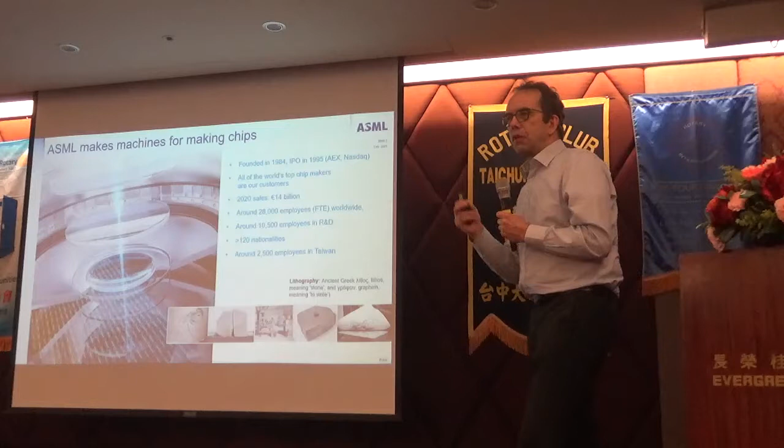ASML is a company that makes machines to make chips. We were founded in 1984. 11 years later, we had an IPO, and we're listed today on the Amsterdam Exchange and Nasdaq in New York.

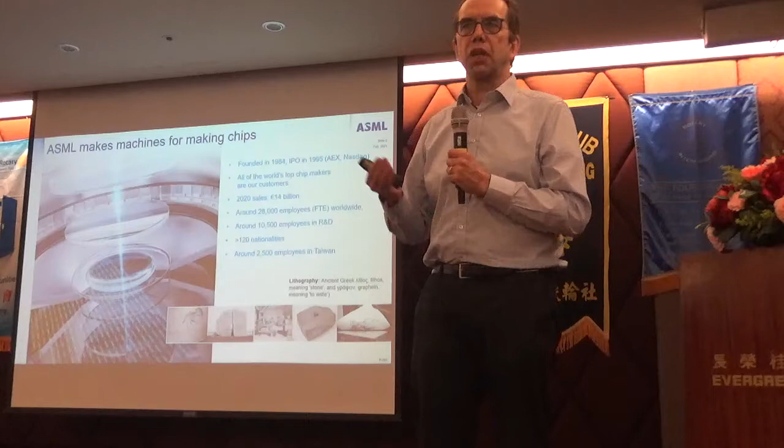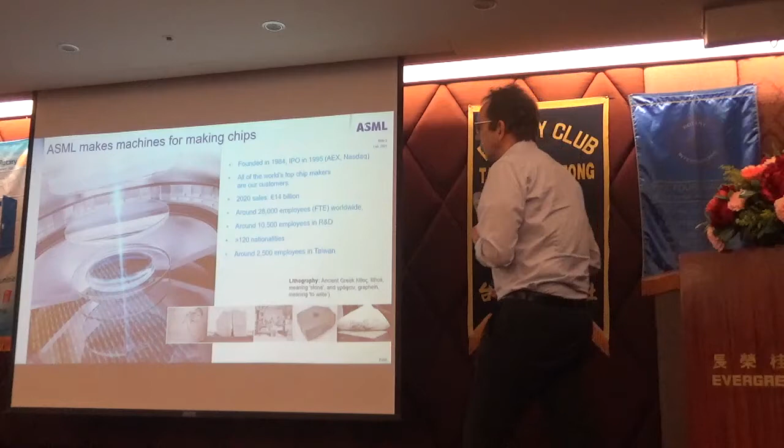Today, all of the world's top chip makers are our customers. So TSMC here in Taiwan, but also Samsung in Korea, Intel in the United States, SMIC in China, they all are our customers. Last year we had 14 billion euros of sales worldwide. For that we needed 28,000 employees worldwide.

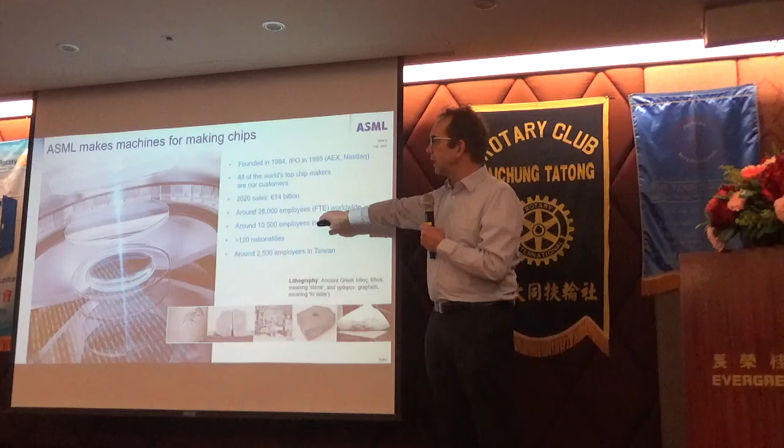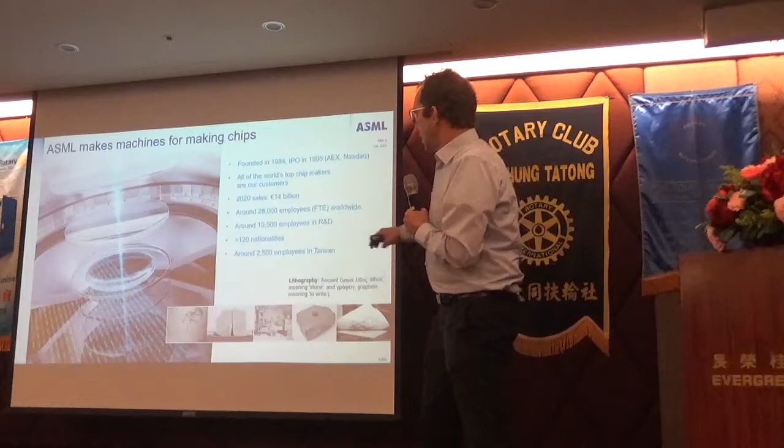Almost half of the people are in research and development, because development of these equipment is crucial to the progress of the company. We have more than 120 nationalities at ASML, so almost every country in the world that has a university education has people working in ASML.

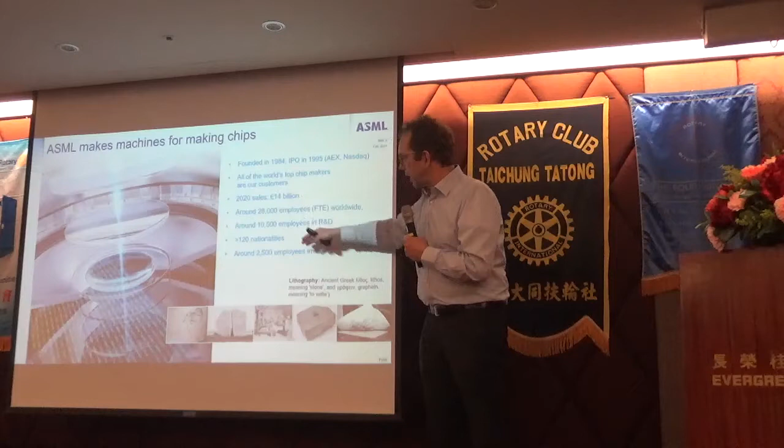And here in Taiwan we're also big, 2,500 people working here in Taiwan in support of TSMC in manufacturing a part of our equipment as well.

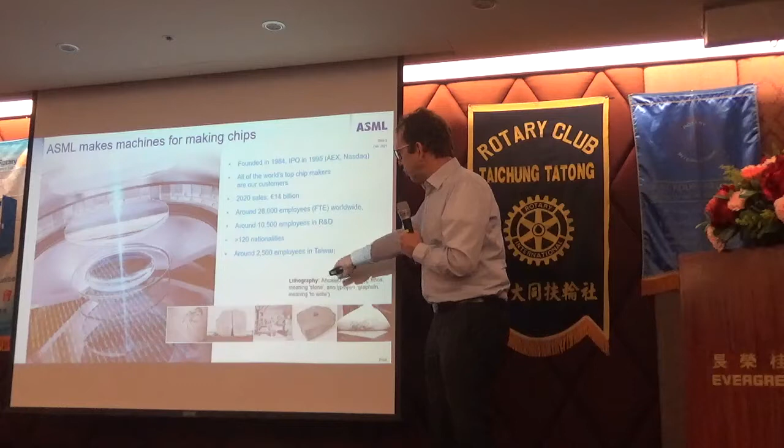Lithography is what we do. And lithography is a Greek word composed of two Greek words, lithos, which is stone, and graphein, which is writing. So it's writing on the stone. And that is what we do. We write the design of the chips onto the wafer, which is a crystalline stone-like material.

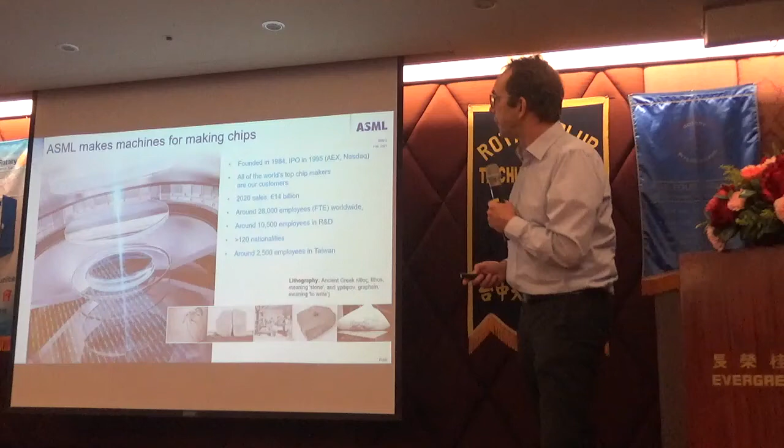The story of ASML begins in 1984 with only 31 people, an attitude that they can make it happen, and it was a lot of work to get it off the ground. There were times when the company was almost bust.

It didn't have a lot of money in the beginning, but already very early on, TSMC was among the launching customers. The relationship was because Philips founded ASM Lithography, and Philips was also a founding partner to TSMC. So the relationship between ASML and TSMC is already a very old one.

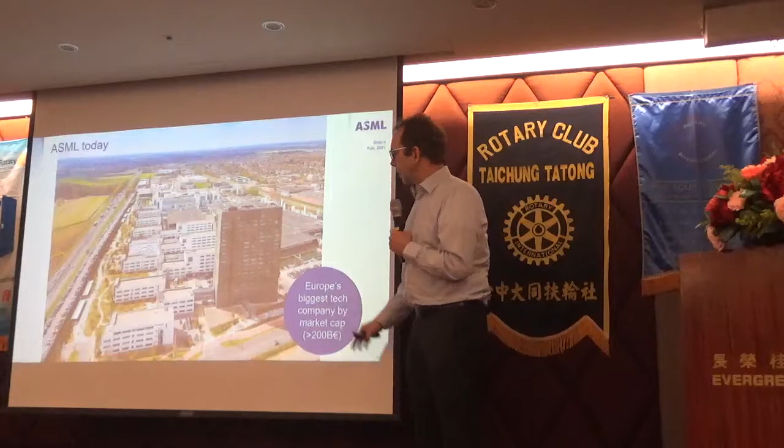If you look at ASML today, it's quite different. All of this is ASML today. We have a 20-story high tower in which our CEO is sitting here on the top floor.

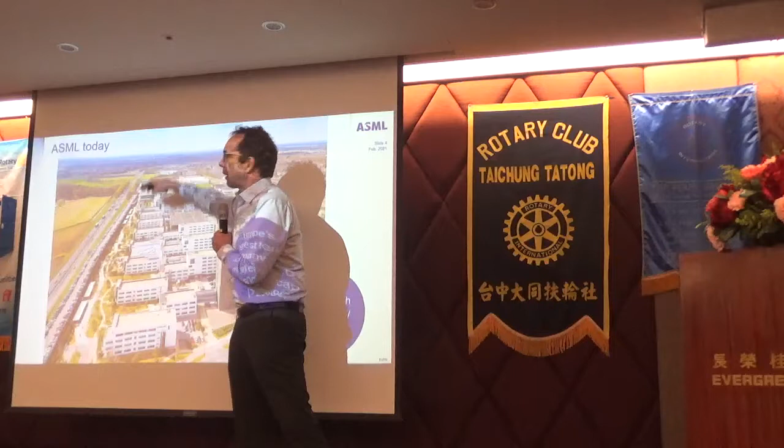We have a large factory for the old systems. We have a new large factory for the EUV systems, and we continue to expand. There's always building going on because we're a growing company.

And today we are the biggest high-tech company in Europe, with a market capitalization of more than 200 billion euros of total value.

So we are present everywhere where customers make chips, which means we have, well, obviously a lot of presence in Europe, that's close to home, but we're also very big in the United States, and we have a lot of presence here in Asia, where our biggest customers today are in Taiwan, in Korea, the US, and that's where most of our revenue goes these days.

ASML is a company that helps propel Moore's Law. And you heard Essen introduce the company, ASML. And these two characters are the characters of Gordon Moore's name. That's no surprise because many companies do, they make a link. But ASML and Moore's Law are tightly linked.

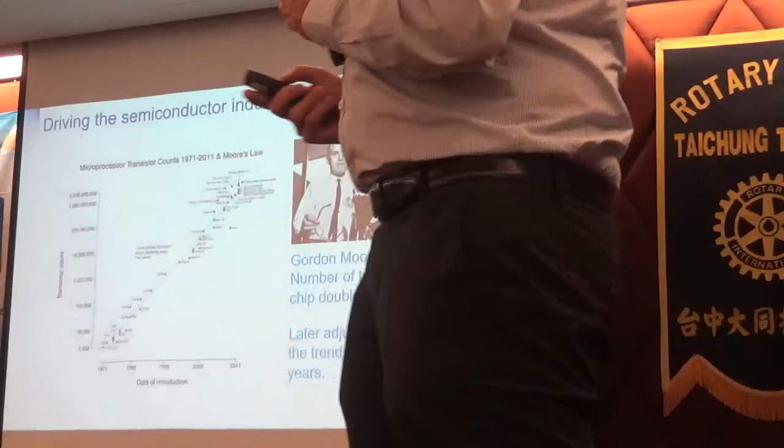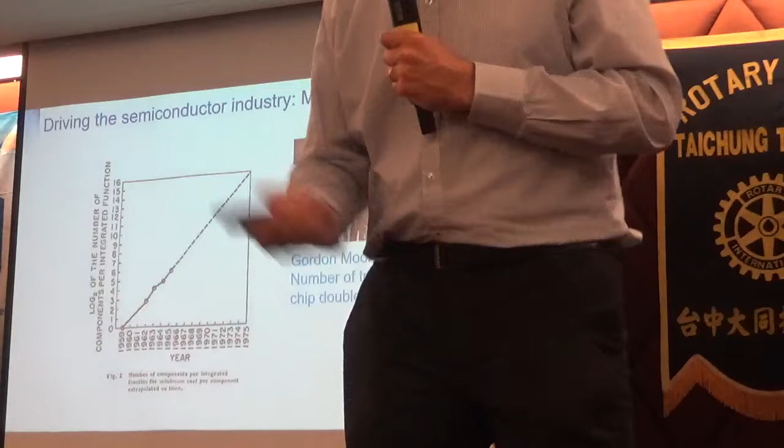Let's have a look at Moore's Law. What was Moore's Law? In 1965, Gordon Moore observed that the number of transistors, number of switches on an integrated circuit was going up very rapidly. And he said, well, the number of transistors on the chip doubles every year. He made that prediction in 1965 based on a couple of data points.

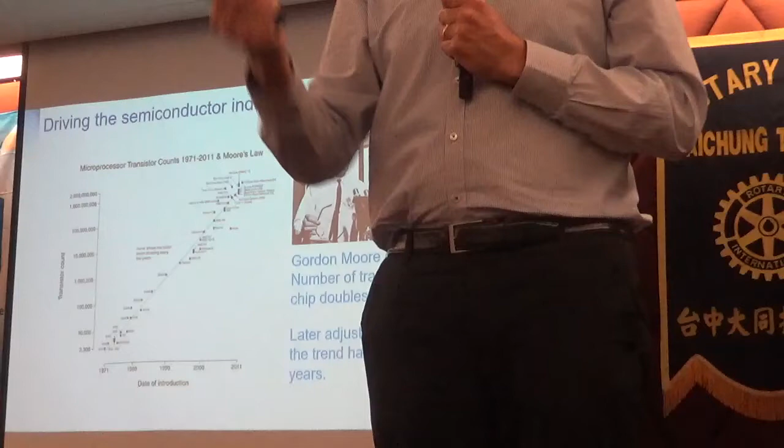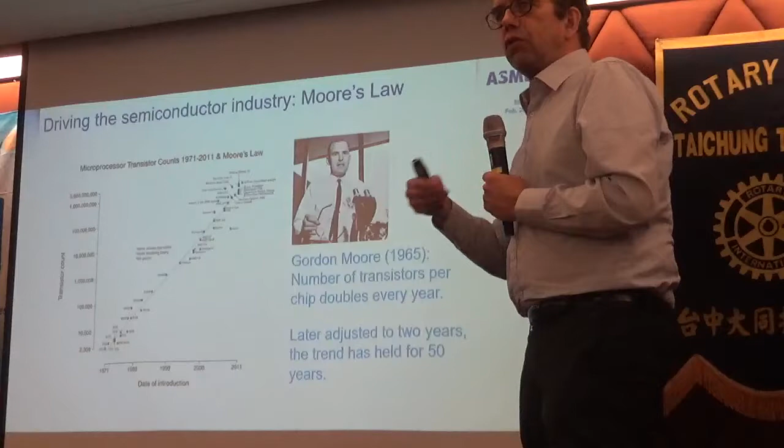We're 50 years later today, and the trend has continued ever since. I don't know if you've ever heard about the famous riddle of a gentleman who asks for a reward, and says, well, to the Chinese emperor: give me 1 grain of rice on the first square of a chessboard, and 2 grains on the second, and 4 on the third, and 8 on the next one. If you go into a process of doubling and doubling, you end up with trillions of transistors on a device. And that's where we are today.

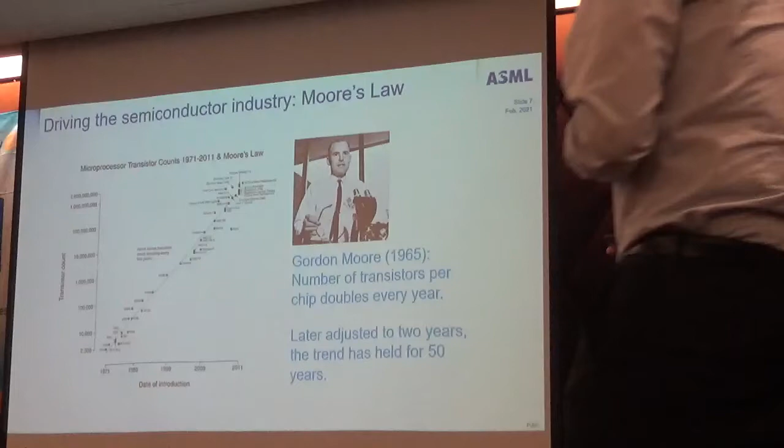These devices are extremely complicated and can do almost anything you can imagine. And the trend continues ever since that time.

We're able to do that because we make them smaller and smaller and smaller. If you look at the design of a chip, from one generation to the next, the design remains more or less the same, but you make it smaller. By making it smaller, more of these chips fit on the same area. We write these chips on round substrates, which are thin plates of silicon, 300 millimeter in diameter.

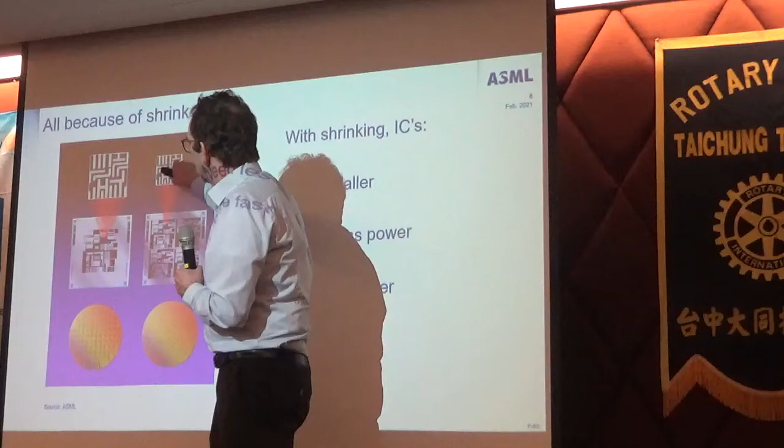And with this shrink, these integrated circuits, these electrical devices, obviously get smaller. But because they are smaller, they need less power, because this needs more power than this. And because they are smaller, the signals have to travel a shorter distance, so they get faster. And because they are smaller, there are more chips that fit on a wafer, so they also become cheaper. So all at the same time, from generation to generation, you get smaller chips that need less power, are faster and cheaper, all at the same time. And you do that for 50 years, doubling every generation. And then you build an industry of billions, and you build a company like TSMC is here today.

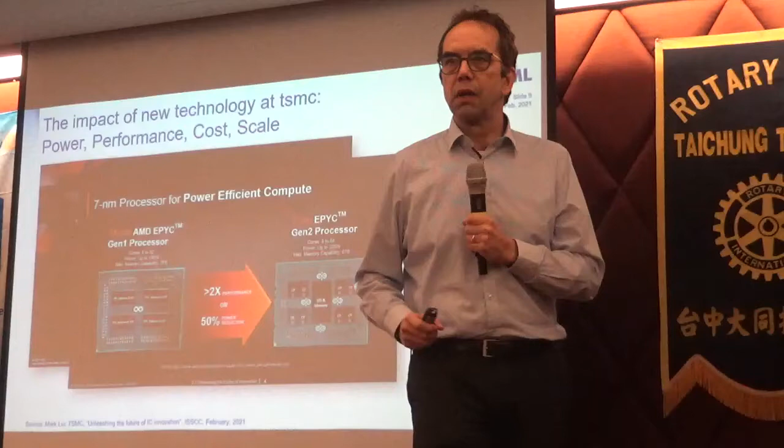Let's have a look at a couple of examples, taking some slides from Mark Liu, TSMC's chairman, which he presented earlier this month. And he shows two examples of this performance.

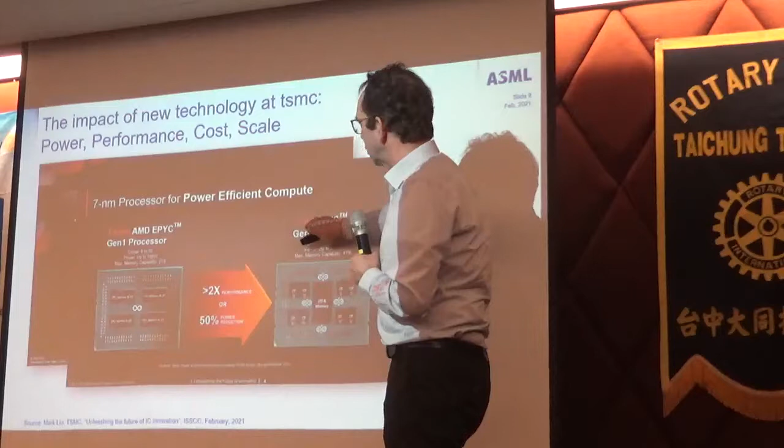Just from one generation, 14 nanometers, to the next generation, 7 nanometers, smaller - everything is getting smaller. And by making things smaller, one of their key customers, AMD, is able to make their processor double the performance or half the power. Huge, major steps moving forward.

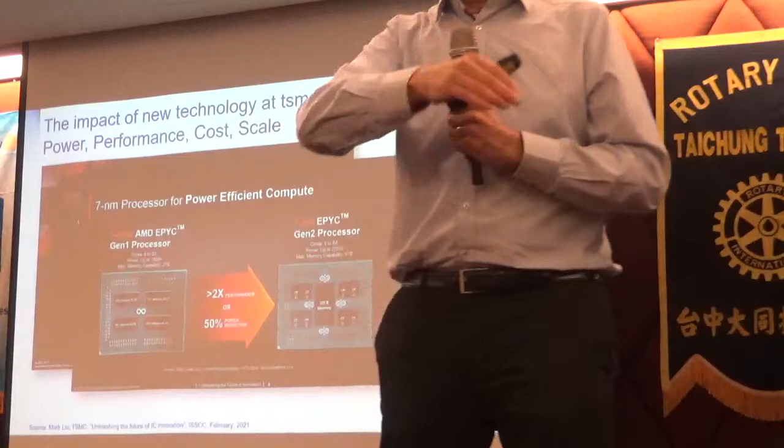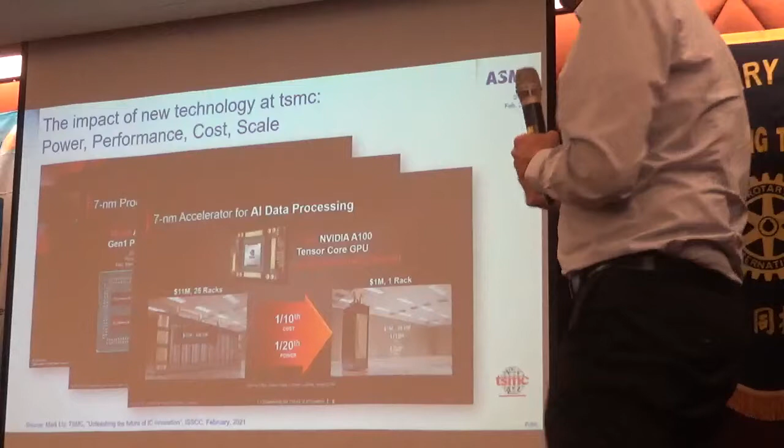Or another example of another key customer, NVIDIA, of TSMC, who make accelerators for artificial intelligence data processing - that is high performance computing. The previous generation cost $11 million and had 25 of these racks, and obviously they consume a lot of power. The same performance can now be realized in one rack, $1 million - 1/10th of the cost, 1/20th of the power.

So it is these kind of advancements that make it possible for the industry to grow.

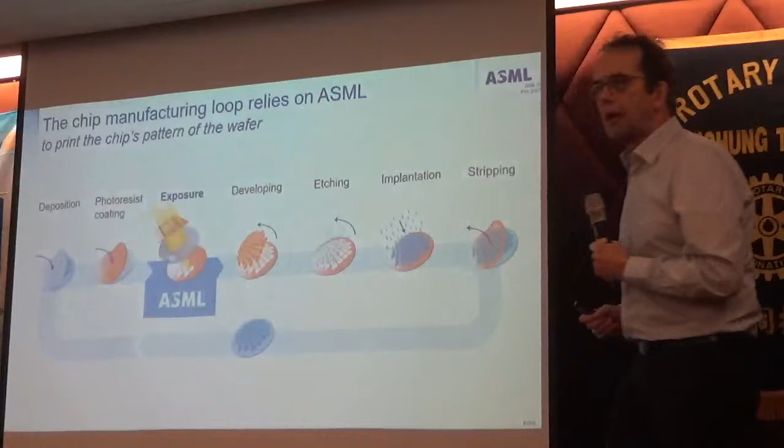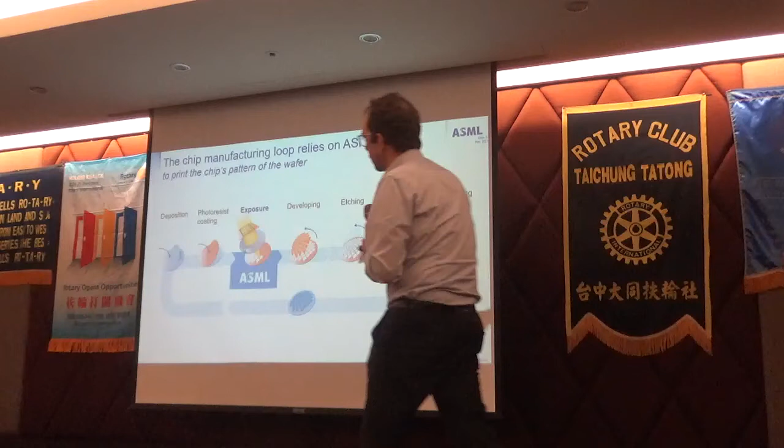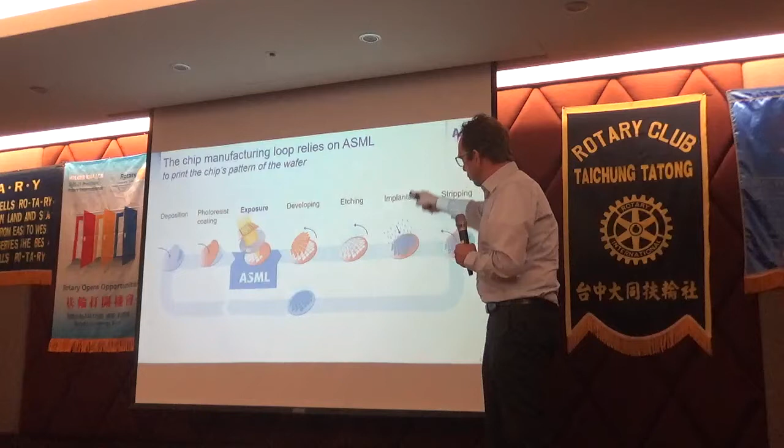So let's have a look at how these chips are made, because it is a very complicated process to make a chip - it is not easy at all. There are 100 times you go through this cycle in making a chip. You deposit a very thin layer of materials, like a layer of bricks in a building. You deposit a photosensitive material that you can illuminate light on and copy a pattern from a reticle onto a wafer. You develop the pattern, you etch the pattern from the photoresist coating into the film. You modify the surface of the wafer, you strip it, and you do this again - you do this 100 times. So layer by layer by layer, you build your device.

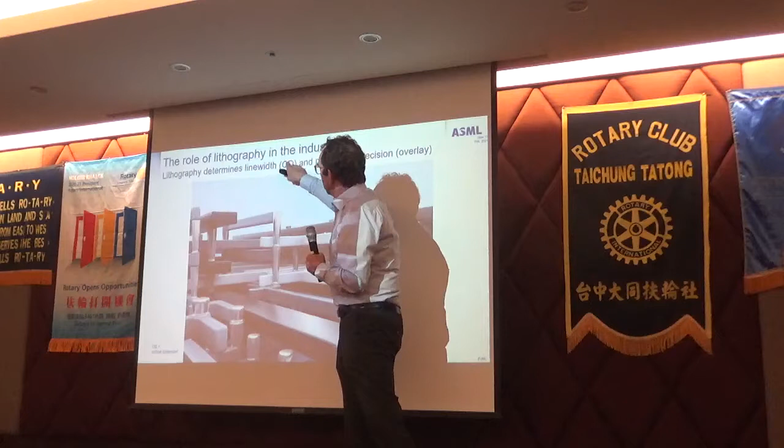The layers are made by different companies, but the patterns are made by ASML, and there are two key parameters important. One is the critical dimension of these features - how big are they, and can you do that very well? And the other one is how well can you place them, because as you can see, you need to put these on top of each other, and they have to fit, because otherwise the whole thing falls apart - you get shorts, you get non-functional devices. But two critical parameters.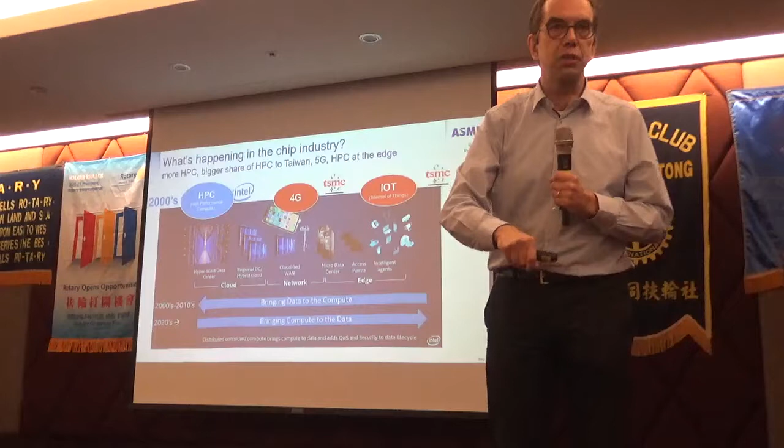But things are changing, because the computation is getting cheaper and cheaper, and the communication is not getting much cheaper. So today, computation is cheaper than communication, so it's better to bring the compute to the data rather than the data to the computer. So this is what's happening now, and this has major consequences.

First of all, not directly related to this, we have artificial intelligence, and artificial intelligence is different than what Intel used to be good at. And all of the big data centers, the big cloud companies, are getting very big, such that they know better what is needed in their data centers than Intel does. So Amazon and Google and Facebook, Baidu - they all decide to make their own chips because they feel that they can do better than Intel.

And these chips have to be manufactured somewhere. Well, guess where? Here at TSMC.

Then we get the 5G network, which you must have heard of. The 5G network is much faster, but it can only be fast because it is intelligent. And intelligence means that you put high-performance compute capability in there. So 5G is growing, and TSMC is benefiting.

And then we're going to move the compute to the data. So this Internet of Things, which used to be stupid, is now getting intelligent. It also gets high-performance compute capabilities. In a car, there are many chips in there which are increasingly more intelligent. And again, TSMC is benefiting.

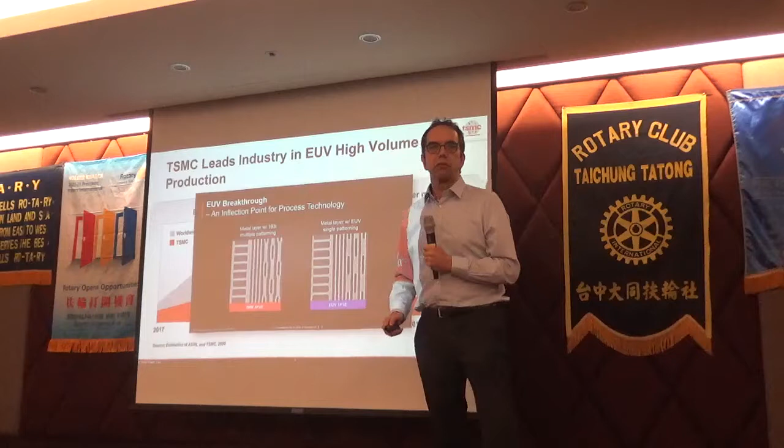This is also from Mark Liu's presentation. He shows that we could make it with multi-patterning, very complicated multiple steps, but with a single step of EUV, you get a pattern that looks better, is better defined than with all of the steps before. So it's simpler and better.

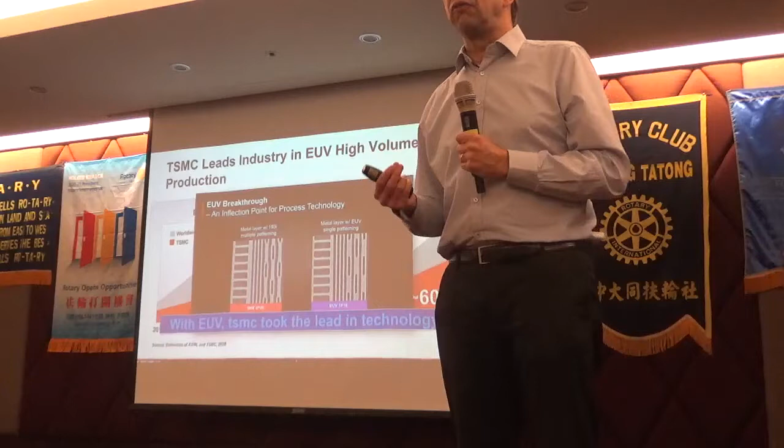And with this EUV, and with a high adoption rate of EUV, TSMC is now in the lead. They are ahead of everyone else in the industry. They provide chips that no one else can make. And that is based on the EUV system that ASML has been able to supply to TSMC.

These are big systems. They're as big as a bus. And let me quickly show you what the layout of the system is. So this is a system that puts the patterns on those round substrates. First, these are measured in order to put the pattern at the right place.

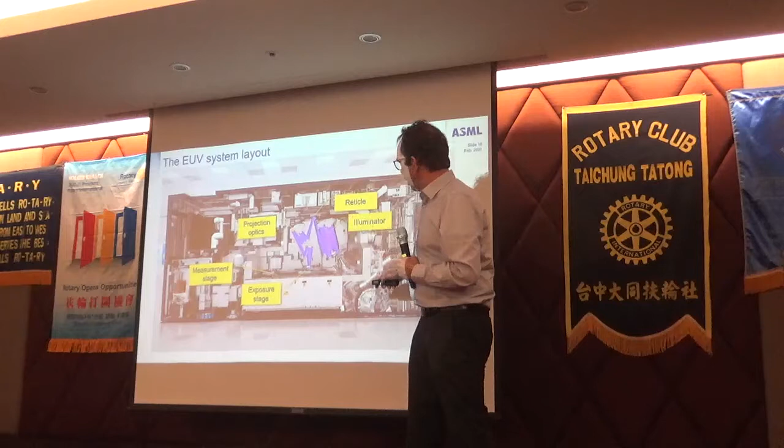Then they are exposed, the pattern is printed on the wafer, and that is an optical process in which a projection optics, a lens, projects an image which is on a reticle, and the reticle is illuminated with light that is reflected there, coming from a source in the system. And I'll show you a little video that shows all of this in action.

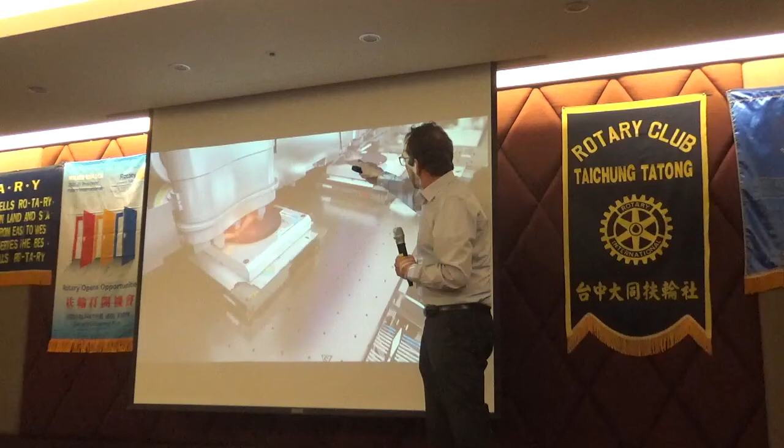This machine costs around 150 million US. So these are expensive machines, but they're complicated. In that machine we generate the light by hitting a small droplet which evaporates and explodes into extreme ultraviolet light. We expose that with a very rapid movement of the stage, as you see happening here, because exposing this whole wafer takes just 20 seconds. Because productivity is key, you have to go very fast.

You see a complicated system. We do a scanning in sync between the reticle and the wafer to make sure that we get the right movement in the right place. Here you see the scanning process on the reticle, which is moving at a tremendous speed. This reticle is supplied to the system with all robotics everywhere.

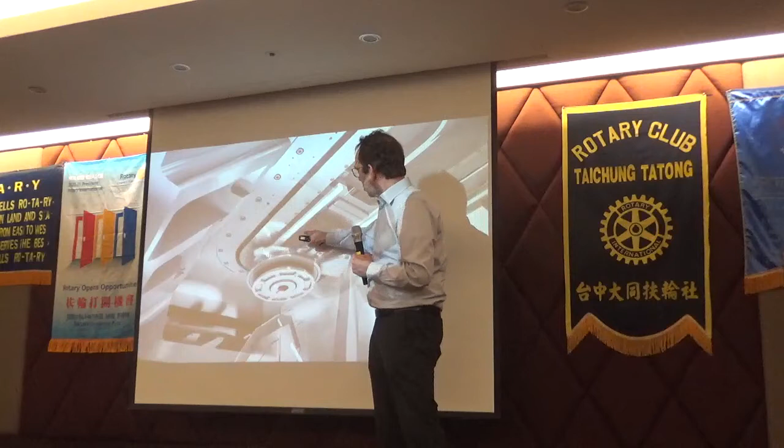Here we bring the reticle into the system, which is entirely under vacuum, so there's no air inside. This is the reticle stage, and we swap these two reticles. Take the one in, the other out, and minimize the time between to avoid downtime.

And here you see the scanning movement of the exposure over here, and the measurement. And when the measurement is done, you swap these two. Now you can project this one, take out the old wafer, put in the new one. So it's all geared towards productivity at extreme precision.

To give you an idea about the precision of what we're talking about, this is a wafer of 300mm in diameter. The minimum dimension is 13 nanometers. Well, you don't know what 13 nanometers is. The nanometer is 1/1,000,000th of a millimeter. So let's magnify this by 1,000,000 times. If we make the 300mm wafer 1,000,000 times bigger, it covers all of Taiwan.

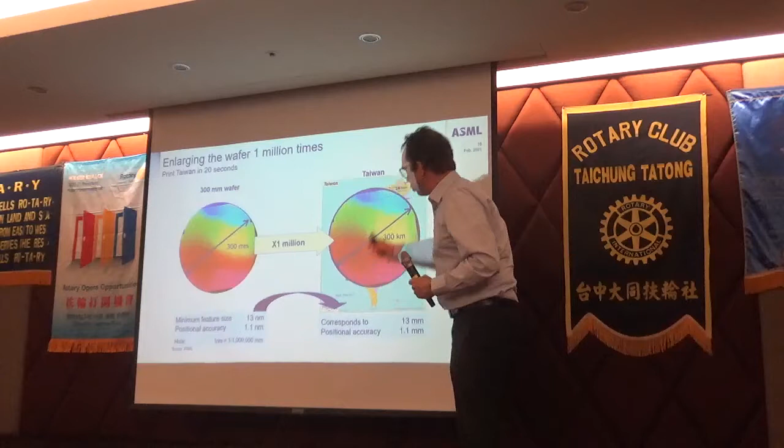If we make 13 nanometers 1,000,000 times bigger, it is 13 millimeters. And the positional accuracy is 1.1 millimeters. So what we do in this machine is imagine printing all of Taiwan with lines as wide as your thumb, with an accuracy of 1 millimeter. And we do that in 20 seconds. 20 seconds later, another one, and another one, and another one. So it's quite amazing what is possible. Obviously, we don't do this on this scale, but we do it on a nanoscale of the wafers.

So I tried to give you a few highlights. Both ASML and TSMC are leaders in technology. We have a strong and long-standing bond, already going back to the earliest days of both ASML and TSMC. Today, we're both playing a very important role in the continuation of Moore's law, and with EUV technology, this bond is only getting stronger. Thank you.

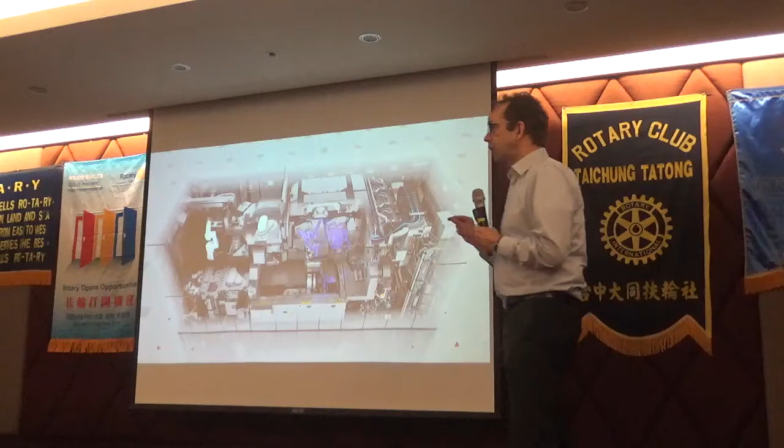The second big activity is that we have a factory in Linkou. In that factory, we manufacture measurement equipment for all of ASML. And we have a second factory in Tainan, where we build electron microscopes. An electron microscope allows you to see the pattern on the wafer that we saw in the beginning of the video—a very precise view of the pattern. So those are the three activities we have: support of TSMC, the factory in Linkou, and another factory in Tainan.

So, I'm curious—can you find enough engineers in Taiwan to work for your company? And also, are young engineers well trained in school before they apply for jobs at your company?

There is clearly a tension in the job market today for engineers, because it is going very well with the industry, and ASML is growing, but so is TSMC, and along with ASML, all of our peer companies are also growing. So it is difficult to attract good people. Fortunately, if you are a leading company, you have something special that appeals to people. One of the things I noticed here in Taiwan is that almost everywhere I mention I work for ASML, people know the company and the role we play. That is also very attractive for young people who want to join a leading company. So it is difficult, but for us a little bit easier than for companies that are not as well known.

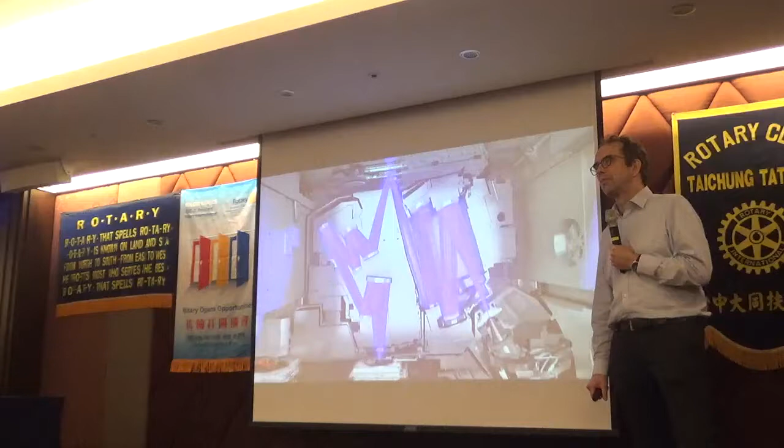I'm sure there's a lot of questions I'd like to ask, but I shouldn't take up too much time. Any further questions, Terry? It's a really big topic for me, especially the technique. But I'd like to know, how far ahead are you and TSMC? How many years ahead of the life we're living now?

That's a bit of a difficult question. The easiest way to measure it is in terms of the output of the chips from TSMC—I showed how many transistors can be on a chip. On that dimension, TSMC is probably one to two years ahead of everyone else. As far as ASML is concerned with our technology, there is nobody who can supply EUV technology, and ASML has been working on it for 10 years. We are the only supplier of that technology, so there's no dimension of saying how far ahead we are—we are the only one, and as far as we know, no one else is even trying to develop it at this point.

So I'd like to know what's the biggest threat in your business? I think the biggest threat is complacency. The industry has come where it came by a constant drive towards new technology, and that's a very tiring exercise. A lot of people are running constantly, and some fall in the process. We are where we are because we kept running for 50 years. The biggest risk is feeling that we are ahead and deciding to slow down.